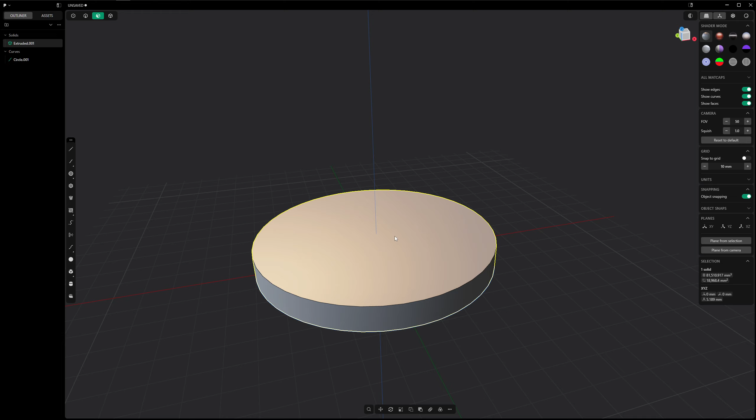Now I want to grab the edge here, this little edge, and hit the O button to offset it. I'm going to offset it and bring it in to say there, and hit enter.

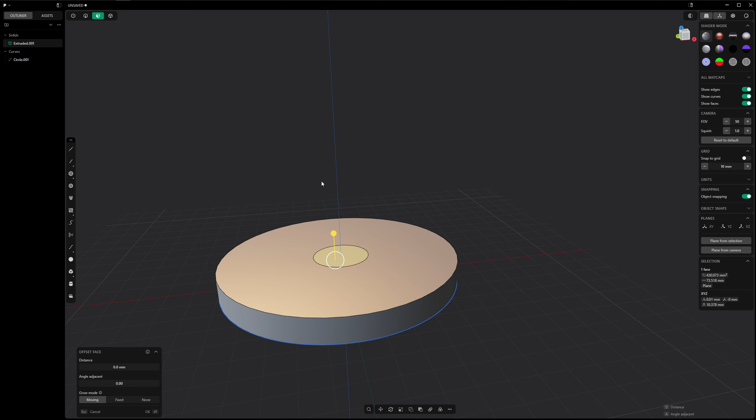Then I'm going to grab the face button again, click on that, and we're going to extrude that up like so, and hit enter to say we're happy with it.

I'm going to create another circle here, make it right on top, and say that's fine. We're in face mode, so we'll click on that and drag it up, hit enter. Now you see we've got two solid bodies here.

I'm going to grab this solid body right here and move it down here, putting it right about there. That looks good. Whoops, undo. Move again, and we'll move it right there.

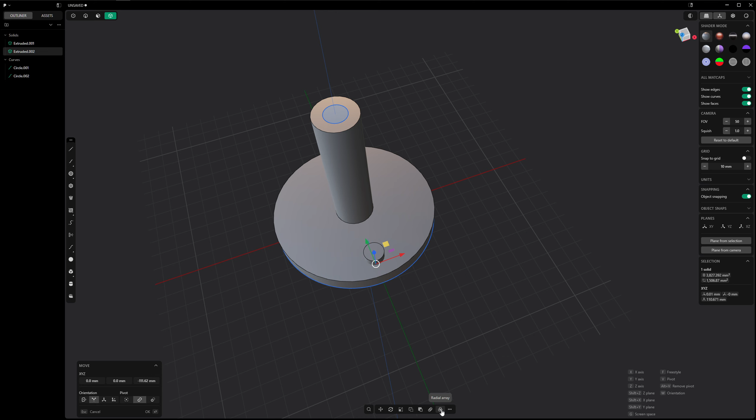I'm going to move it down and put it right between there, because I'm going to do a boolean. Before I do a boolean, I'm going to do a radial array, right on that center point. So here we have our boolean parts. I'm going to say OK.

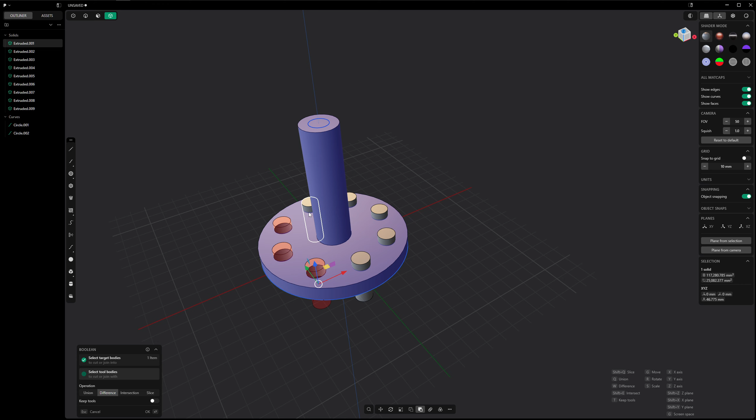I'm going to select this, press this boolean button, and shift click on each one of these to punch a hole through that bottom portion there. I'm going to hit OK.

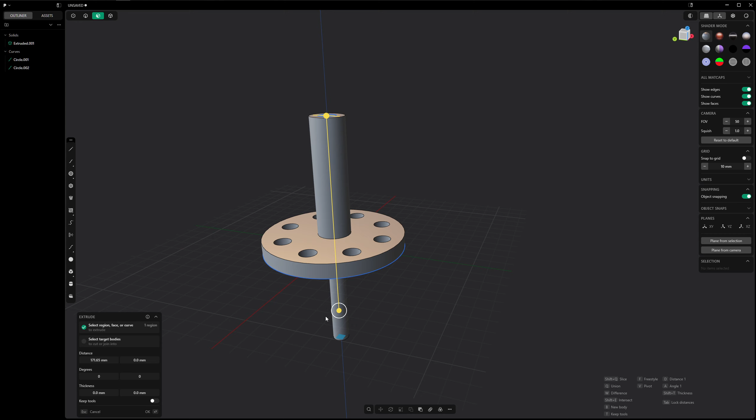So far so good, we have a cool little thing. Now I'm going to take this flat piece I made previously and extend that down. I might be doing some of this wrong, I don't know exactly all the ins and outs of this tool yet. This is something I've been toying around with and haven't read the manual yet, so I'm just kind of playing. It's real intuitive.

This is absolutely not reading the manual whatsoever. Maybe I'll watch a few YouTube videos, but very, very few. It's really, really intuitive. So I'm going to go ahead and do the same thing here.

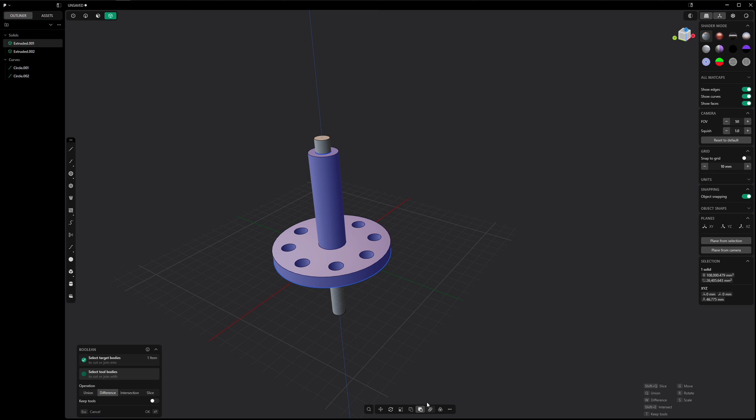I'm going to punch a hole in this, so I'll boolean, and there, punch a hole. Okay, so far so good. Everything is moving along real nice. I really like where that's going.

I think this has a lot of good features in it, a lot of really neat tools, and as I get going here, we'll share everything that I've learned so far. I think it's a tool that can be used for any Lightwaver, especially for modeling things that might be a little difficult to create on your own. I would definitely check into this tool.

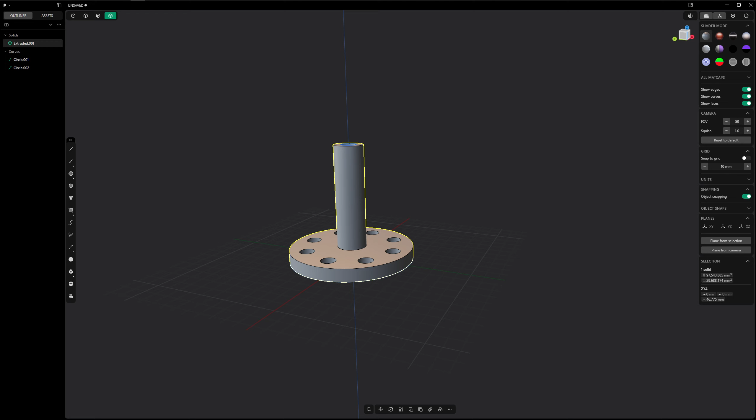So here we are. So far what we've done isn't terribly interesting, but we can make it a little more interesting by using some of the other tools at our disposal. Let's hit the edge tool right here. First, let's get rid of these parts we made, these circles, we don't need them anymore, so we'll delete them.

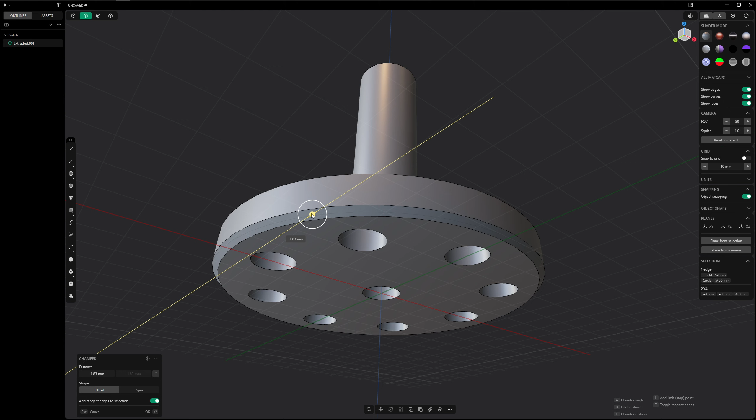We've got our edges, and we're going to grab this edge right here and chamfer it a little bit. We can put a chamfer in like so, which is great. That looks good, we hit enter.

I want to do the same thing to all these down here, chamfer all of them. Maybe there's a way to select all these at once, but like I said, I haven't read the manual, so maybe once I read the manual we'll find out. We'll just put a little chamfer in there. Very good.

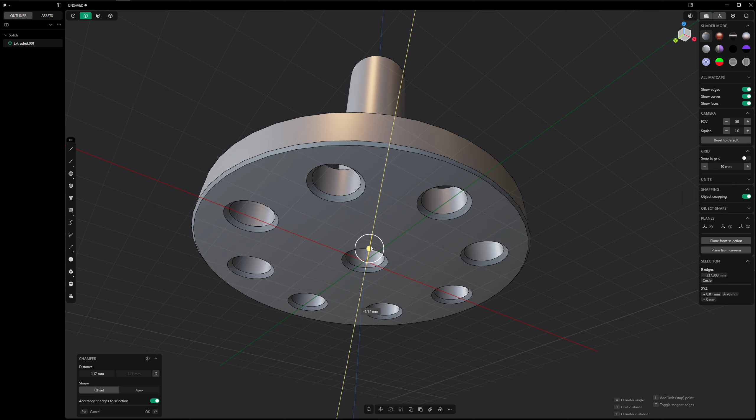Okay, so far so good. I like what's happening. Over here at the top, I want to do the same thing here. I want to put a little chamfer in here and here. Very good. Nice.

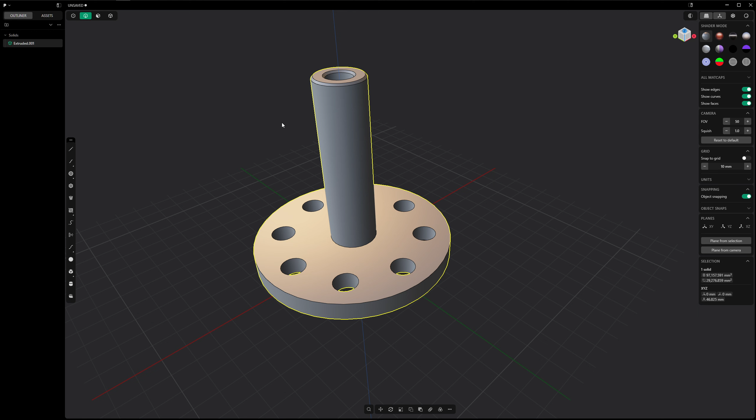Okay, so far we have a part that was fairly easy to make, but it's nothing too fantastic. But we need to add a little chamfer here as well. So we can go here and we get a cool little chamfer, but I want a better chamfer. So instead of going this way, I'm going to just go the opposite direction, and I get this cool fillet that's happening. And I'm going to continue on with my fillet, and I'm going to just grow this thing up because I'm getting a really cool shape.

Could be a nose cone to a jet or something, I don't know. It's really neat. I like that. So very, very pleased with that.

So again, I'm going to add a little chamfer to this. Well, you know what? Maybe not. I'll put a nice little fillet on it. Yeah, well, that's looking really cool. And wonder if we can do the same to all these things.

Now, one thing that I did notice here is that instead of turning around, I can just go ahead and click this button here, and now I can see through everything, and I can select through, which is kind of neat. So you can see how that works.

And now we're going to put a cool little shape. Very nice, very nice. So far so good.

But there's more tricks up the sleeve here. Let me just show you some of the tricks here.

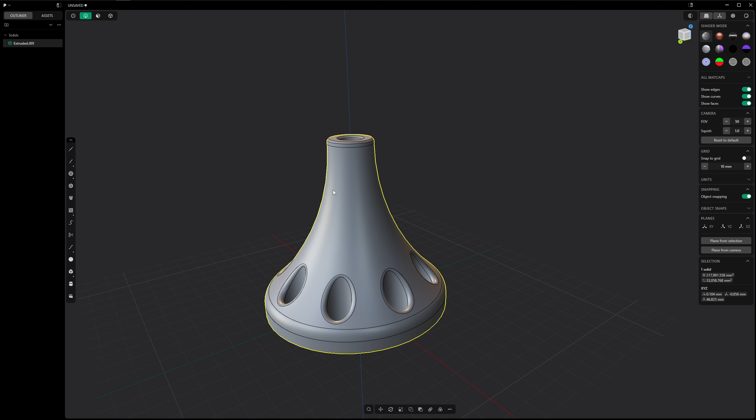Well, let's just see here. Let's go back to Plasticity and let's muck about with this a little bit more. Let's grab this right here, and we're going to just bring this down. We're going to flatten it out. And we're going to say, oh, that's cool.

But now what I'm going to do is select this, and select this, and we're going to put a cool shape on the top like that. Oh, that's very neat. Oh, let's go back to Blender.

Ooh, looky here. We have it in Blender. All those things that I did in Plasticity show up in Blender. Well, that's really cool, and that's really neat.

Now what I'm going to do is select this, and go Copy to External. Okay, now I'm going to go up into Lightwave 2023, and I'm going to say Paste from External. And lo and behold, here we have it in Lightwave as well.

Of course, the materials don't come through and everything, and that's to be expected. But we do have it. So let's go ahead and crank up the metallic on it and turn up the roughness, smoothing. Smoothing's got some issues, definitely. We'll have to work on that.

But you can see that through using Blender and Plasticity, we can get something rather cool into Lightwave real easy.

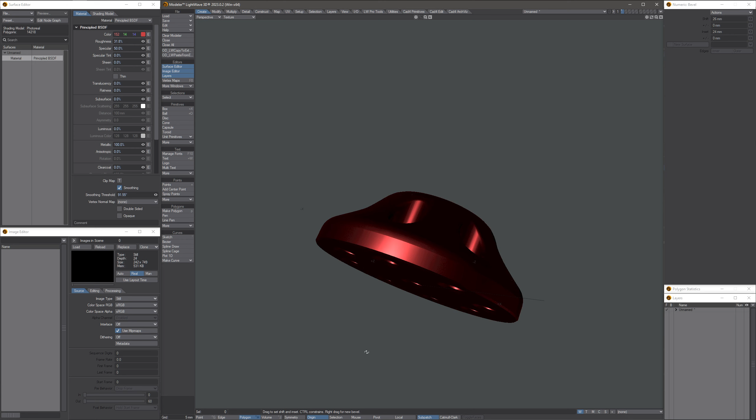Now there are different things that we can do to this, both in Plasticity and in Blender. So let's say we just wanted to pump out an OBJ to go directly from Plasticity to Lightwave without round tripping through Blender. We can go up here and hit export.

So we hit export, and we'll just call this dump thing 2, and we'll hit save, and we get this little dialog up here. And you can see now we have some options in this dialog.

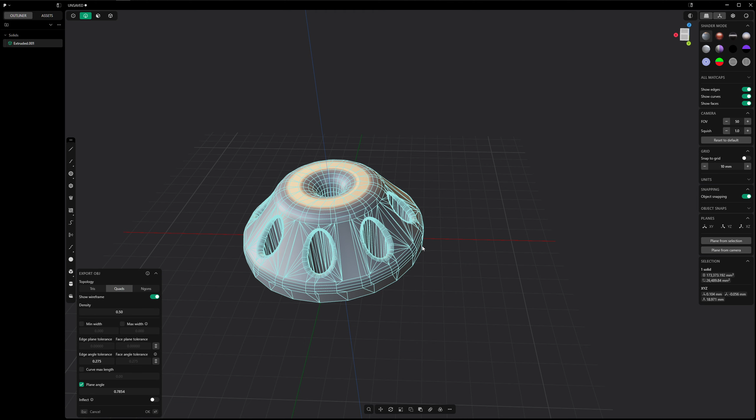We can convert everything to quads, and we'll get a real-time update, or we can even go to n-gons. And not only that, we can change our density and kind of change the basic flow of this object in its exporting. Okay, so that's one way of going about getting an OBJ out of here, and many others, file formats.

If we hit export, there are many other formats, some solids, step files, STLs to go to print, SAT file, all kinds of files. And then it also imports many different files too, a lot of your solids-based files and whatnot.

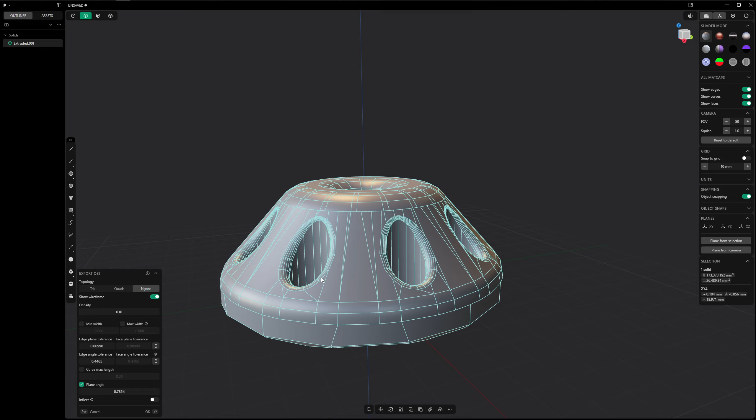So that's one way of playing around with the geometry and converting it to a different format or a different flow. The other option is to do this in Blender. So we have this here in Blender, and let's go to wireframe mode.

We have this refaceting thing over here, and you notice we're on tris right now, so we can go to n-gons, and we hit the button, and now it's refaceted as n-gons. But then we have an advanced level, and then we just have some basic utilities here that we can play around with and change the way our polygons are.

So you can see there it simplified it even further. Let's go the other way here and see what we get. And for me, it's just a lot of trial and error here. Let's go with the faces there.

Now if you wanted to maybe bring this into Lightwave to sub-D it, and maybe something like this, you could use it to sub-D it with minimal work, but you can also use it

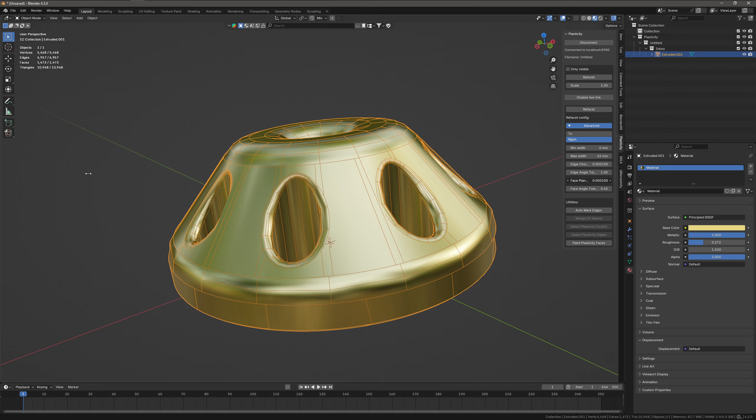inside a Blender and just create a lot of polygons as well to give you a really nice look. Oh, that looks nice right there. Let's go, and again, I haven't read the manual, so I don't really know what a lot of these buttons do, ooh, there you go, what all these buttons do and everything. It's trial and error. You get it and play with it, and you see what works best for you.

You notice here that it's a very dense model, but man, it's very, very, very clean and very smooth. Hardly any errors. It looks like that would render beautifully.

So let's go ahead and send that to Modeler and see what that looks like. So we copy to external, and we come over here to Modeler, and we'll just say paste from external. And what do we get? Oh, wow, we got a ton of errors here.

Make that double-sided. A lot of that goes away. Turn off smoothing. Yep, it looks like there's some issues. A lot of polygons, but a lot of things that are flipped. Probably need to use some tools to clean that up, but I think it can be done.

I haven't experimented too much with this side of things, but in Blender you can see that now if you don't want to deform the model in any way, you could certainly use that as is, inside of Blender. I don't see any issues at all whatsoever.

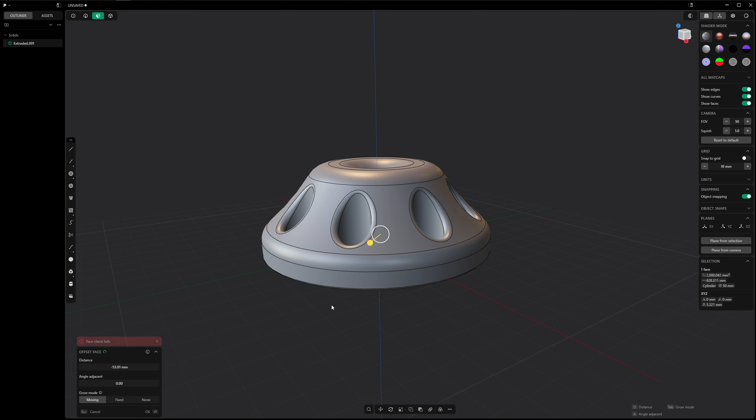and let's see. Oh, we're getting some errors. So ooh, interesting. Ooh, what was that? That was very cool. Looks like it's struggling and thinking, and okay, so apparently that's not gonna work.

Let's see what we can do here. Oh, we can bring that up like so. Oh, that's pretty nifty. Whoops, that didn't take for some reason. Okay, there we go.

And let's see, in Blender. Yep, came over in Blender. So very cool. Very cool. So yeah, the Blender Plasticity Bridge, think of it as the hub, I guess, for Blender.

It's an add-on. It's completely free that you can get for Blender, so that it's a live feed between Plasticity and Blender. And if you are a heavy Blender user, which I am not, but if you are, a lot of the shortcuts are the same in Plasticity as they are in Blender.

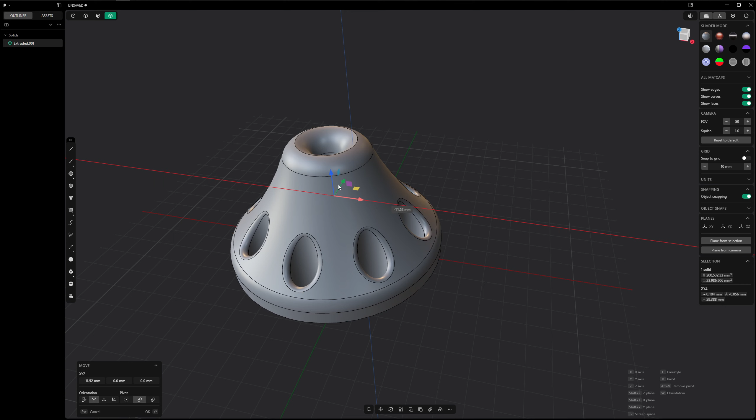For instance, G for move, and you can move. R for rotate. S for scale. There are a lot of similarities there.

Like I said, I'm not a huge Blender user, so I don't really know the shortcuts. And then I think like Shift D, I think, is for duplicate. Yeah, duplicate.

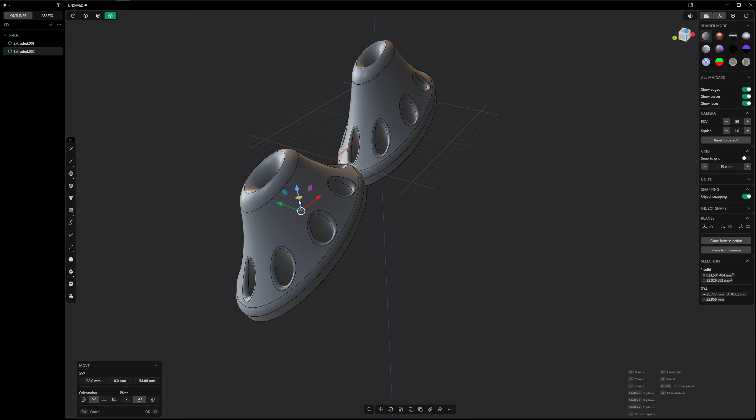So yeah, if you are a big heavy Blender user, everything's the same or very close to it, all the shortcuts. So that's one advantage if you are a Blender user. And stuff does come over, so that duplicate is there. It looks like it's hiding behind the other one. I don't even use the shortcuts in Blender, but I'm not a heavy Blender user. I just use it for a few things here and there that Lightwave isn't well suited to do.

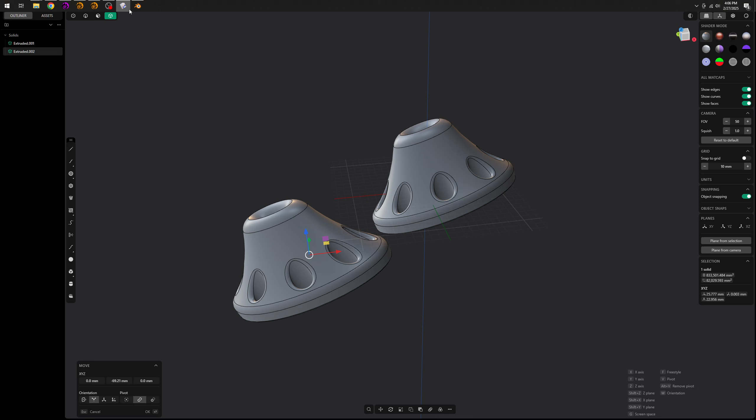So anyway, that's a little demonstration on Plasticity, and again, it just came out with a new version a few days ago. They just mainly made some modifications to the UI, which look pretty good. You can get different matcaps that you can put on it and things like that.

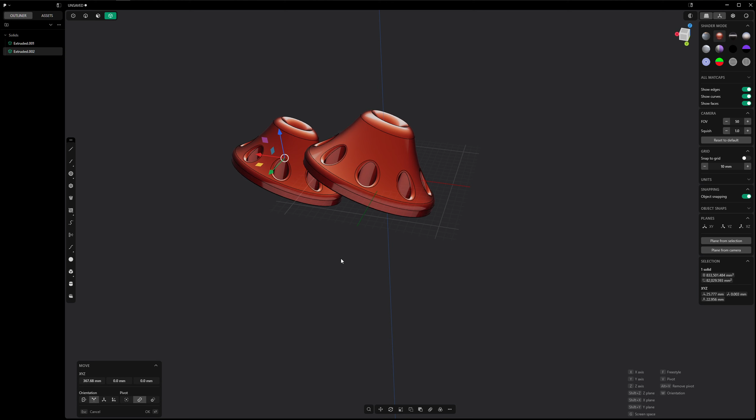So strongly recommend that you take a look at Plasticity. There's a 30-day trial, and then there's 2 paid versions. There's an indie version, which is, I think, $200 or $150, and then there's a professional version, which is, I think, around $300. But definitely check it out if you are so inclined.